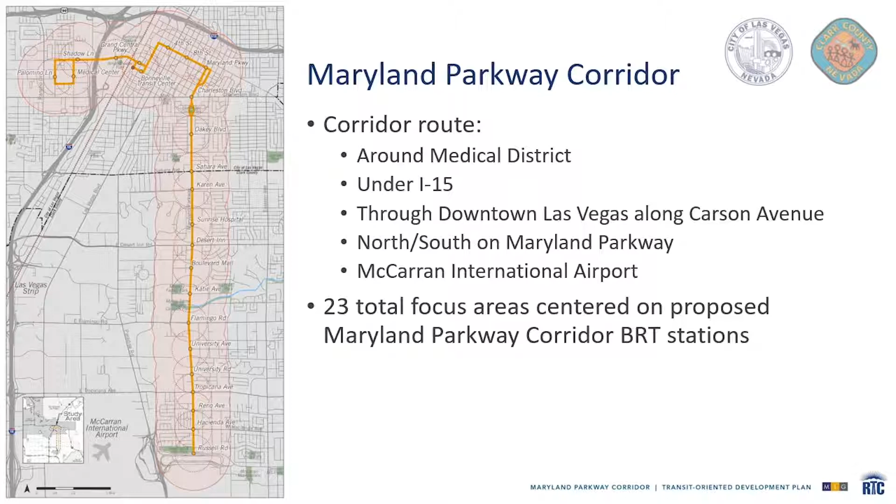In the City of Las Vegas, the focus areas include a half-mile radius around each station, so 1 mile across, focusing on the Medical Center station within the medical district, the Bonneville Transit Center on the west end of downtown, and the Charleston Boulevard station along Maryland Parkway. In the Clark County portion of the corridor, where the dividing line is Sahara Avenue, we included Sahara Avenue with a quarter-mile radius, so half a mile across for the focus area, along with Desert Inn Road, Flamingo Road, and University Road.

The last piece I'd like to touch on before handing it over to Andy is highlighting a couple of the key reports that informed the focus area plans, developed as interim deliverables throughout this effort. These included existing conditions analyses for the entire corridor, covering all 23 stations, as well as a market readiness analysis looking at conditions, both in terms of physical form along the corridor and economic realities for individual parcels and areas, which helped us in the prioritization process mentioned earlier.

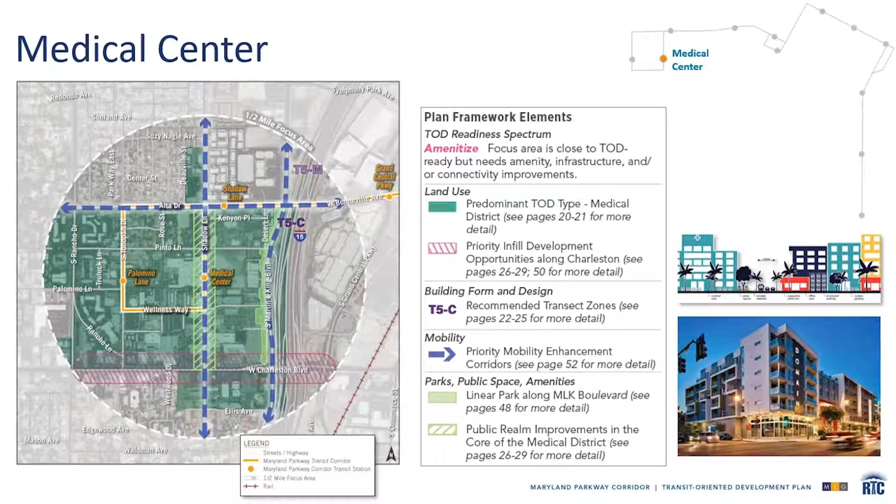For each TOD plan, we've identified a handful of priority projects that are aimed at improving infrastructure, creating or enhancing amenities, and/or kickstarting development in a way that is truly transit supportive. Think walkable, connected, and convenient for those who wish to use transit. All of this is done in an effort to help achieve the vision expressed by the community for each unique focus area.

So within the medical center, our first priority project deals with the intersections along Shadow Lane. The Medical District Master Plan already envisions a really bold future for this area within Las Vegas, and it looks at Shadow Lane as serving as a sort of main street within the medical district. What this priority project is recommending is to really leverage that identity and create a stronger sense of place by picking key intersections along Shadow Lane that can be treated in an extra special way, including wayfinding, gateway elements, perhaps intersection paint treatments, things that really lend to a strong sense of place and identity for the community, but also connect people really intuitively to transportation options.

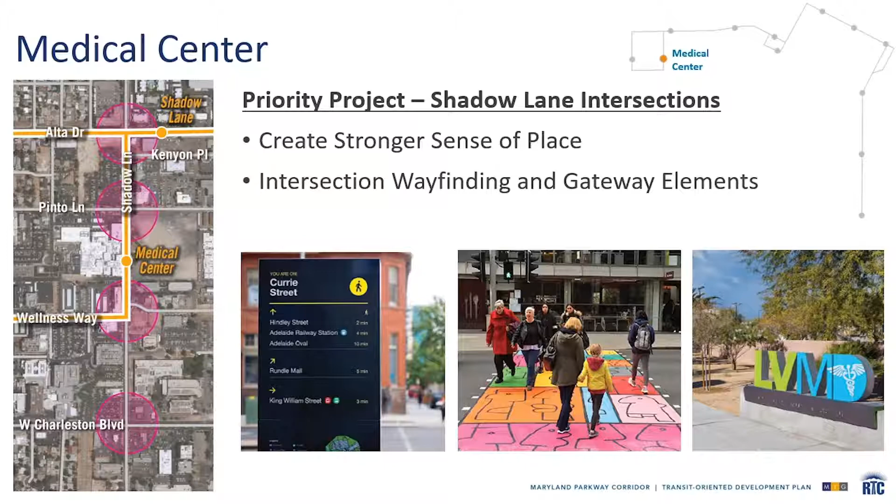The second priority project in the Medical Center looks at the eastern edge of our focus area and recommends a linear park along Martin Luther King Boulevard. Martin Luther King Boulevard today is a fairly well-trafficked, automobile-oriented corridor, and an investment like this would help amenitize that edge along Martin Luther King Boulevard to try to make it truly pedestrian-oriented, helping to accomplish the overall goals of making the environment more walkable within the focus area.

This would be an opportunity for the city to work with existing and future property owners to identify opportunities with underutilized or unused space in front of the properties along Martin Luther King Boulevard to try to help amenitize this space, again, for more pedestrian-oriented use. Amenities that could come along with this type of investment would be increased tree canopy and shade, the opportunity for a wellness trailhead that would connect directly to the medical district along Wellness Way, opportunities for pocket parks along this new trailhead, and a generous buffer that would allow pedestrians to feel safe and comfortable moving north and south along Martin Luther King Boulevard, set back from traffic.

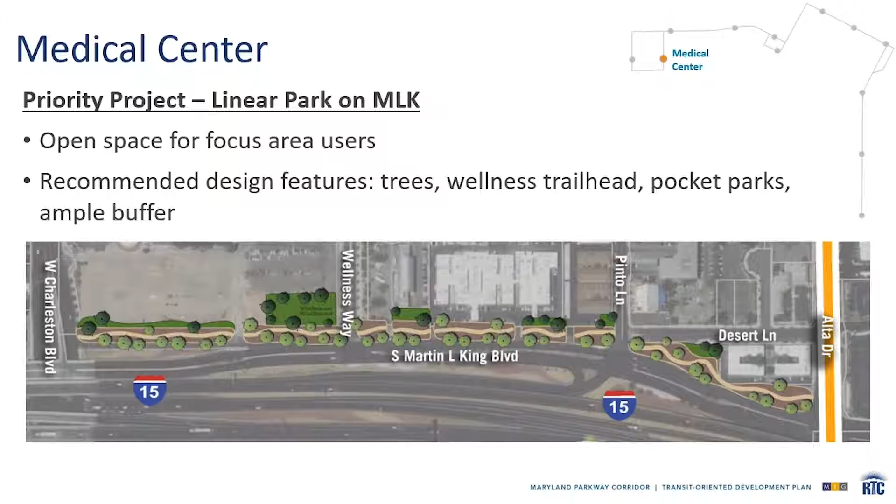The third priority project looks at diversifying the mix of uses within the medical center focus area. Within the medical district master plan, the vision for this area is predominantly medical uses. This priority project aims at encouraging new development to be really intentional about the mix of uses that it includes along with those medical uses.

For example, trying to integrate residential uses above medical uses in an effort to create activity outside of traditional working hours and the traditional work week. Similarly, being intentional about getting uses on the ground floor that contribute to the activity of the streetscape and provide opportunities for individuals using the medical uses to spend time outside of their appointments or working days—just opportunities to socialize and recreate.

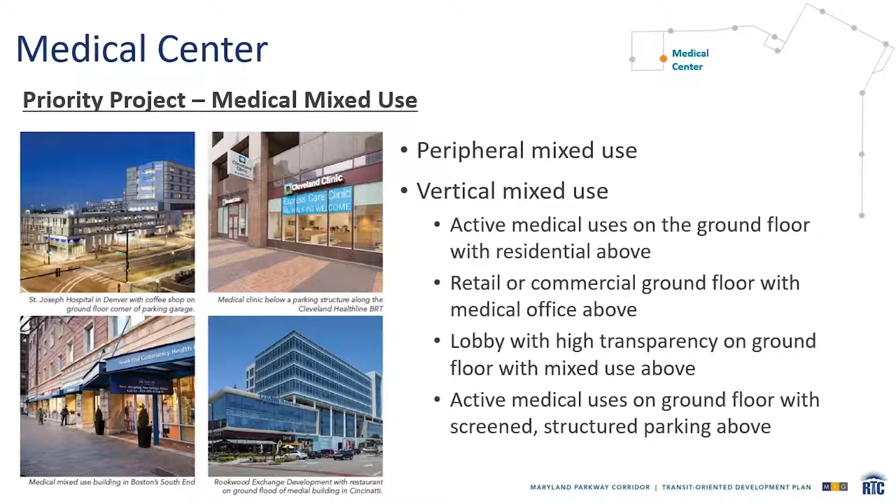Our final priority project within this focus area looks at development and pedestrian comfort and amenities along Charleston Boulevard. Charleston Boulevard serves as the southern edge of the medical district, and this priority project aims to provide recommendations for building frontages, heights, densities, an appropriate mix of uses, and corresponding pedestrian amenities to help transform this portion of Charleston Boulevard into a true gateway for the focus area and the medical district itself.

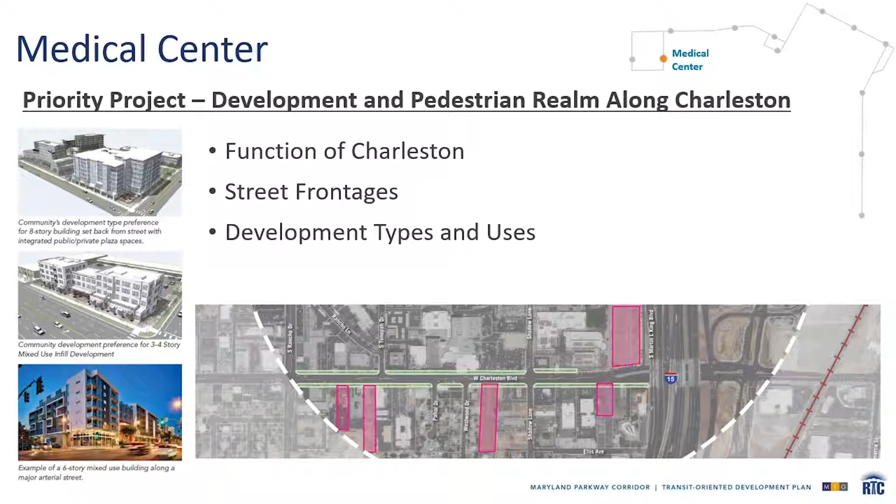This focus area is centered around the Bonneville Transit Center in central downtown Las Vegas. Currently, this area is primarily commercial, office, and civic land uses. There are also community facilities and a good amount of vacant land, but limited residential options. Major destinations or landmarks within this area include BTC itself, the Las Vegas North Premium Outlets, Symphony Park, the Las Vegas City Hall, Clark County Government Center, and many more.

The map on this page represents key highlights from the Bonneville Transit Center TOD plan. This focus area is ready for transit-oriented development already, which is likely to be spurred by the transit investment alone. The type of development we'd expect to see includes high-density, mixed-use buildings with active ground floor frontages. This aligns with the vision and desires we've heard from the community to date. There are especially opportunities for this type of development on parcels that are currently vacant or underutilized, especially near the Bonneville Transit Center, as seen on the map outlined in pink.

While this area already has a well-connected street network, this plan identifies a handful of corridors as priorities for multimodal mobility enhancements, including additional crossings over the railroad. This plan also identifies potential opportunities for parks and open space within this focus area to support current and future users of the BTC and to complement new or infill development.

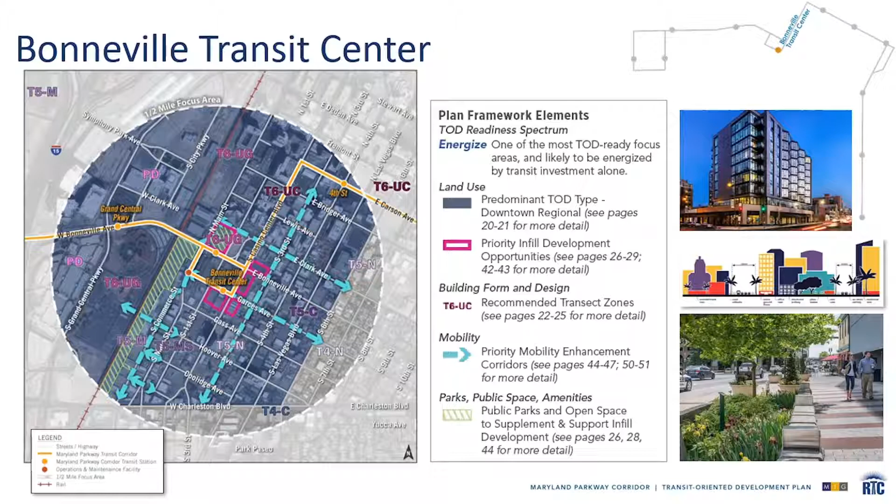For each TOD plan, we've identified a handful of priority projects that can help improve the infrastructure, kickstart transit-oriented development, and achieve the community's vision within these focus areas.

The first project within the BTC focus area is BTC and civic adjacent development opportunities. As seen on the map in pink, there are opportunities to combine parcels that are currently vacant or underutilized and integrate a mix of uses, especially with active ground floors with office or residential above, creating an active and walkable pedestrian environment.

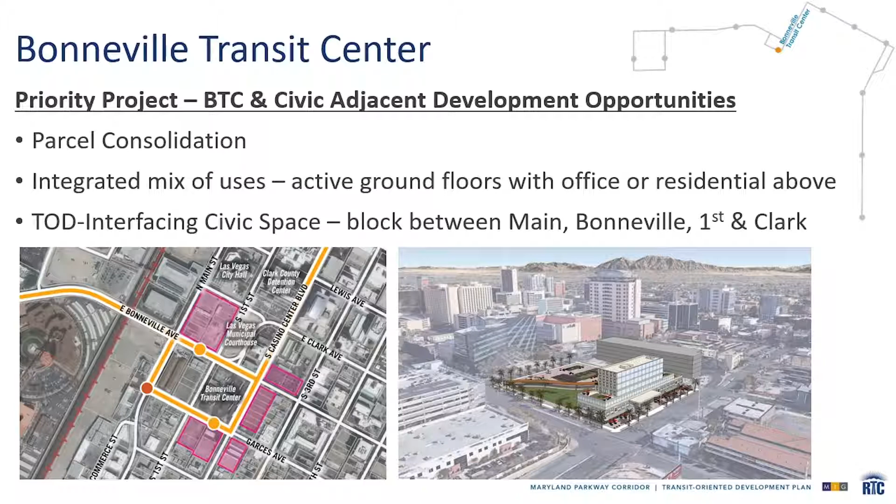The next priority project in this plan includes the parcels along Commerce Street. This is an opportunity for infill development where there's currently vacant land. The vision for this area includes a creative and tech corridor along the rail with potential public open space and additional rail crossings. There are also opportunities at Hoover, Coolidge, and Boulder to connect across Main over to Commerce and increase the pedestrian network.

New development is envisioned to be about 3 stories with active ground floors, maybe with different uses such as galleries, makerspace, or breweries.

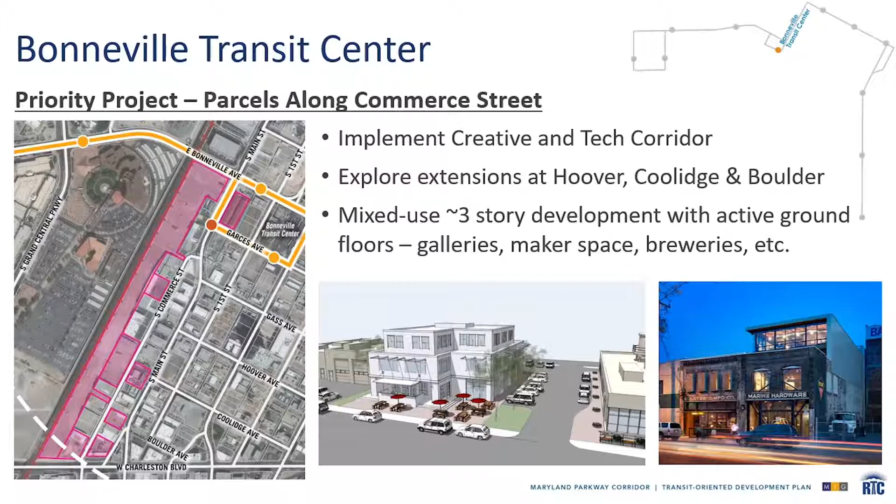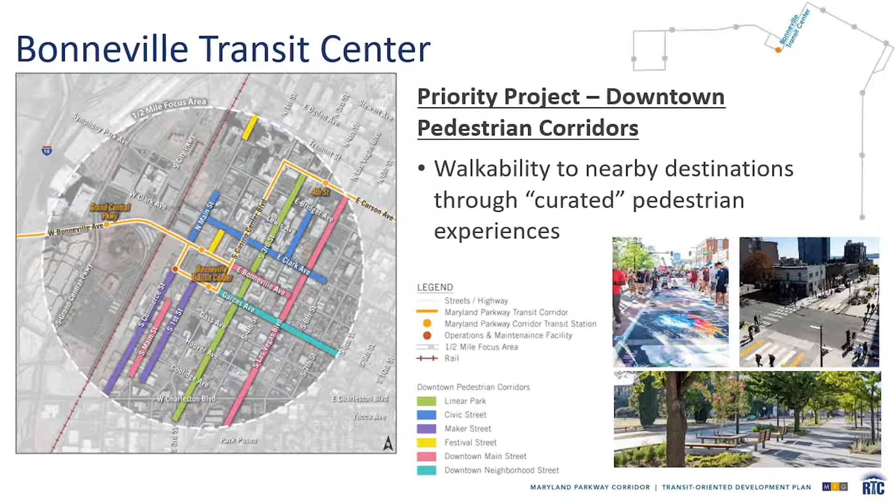The last priority project for the Bonneville Transit Center focus area is Art District branding and wayfinding. This project looks at leveraging all the recent work and momentum from 18B Art District and continuing to realize that cultural hub character. The plan looks at additional options for amenitizing the public realm with branded elements, implementing a pedestrian-scaled wayfinding program, and pairing that with design standards that enrich and preserve the unique character of the area.

The next TOD plan that we'll take a look at is for the Charleston Boulevard focus area. Like the Medical Center and Bonneville Transit Center focus areas, this focus area extends a half mile in all directions from the proposed station location, in this case, the intersection of Maryland Parkway and Charleston Boulevard.

The area is currently made up of primarily single-family residential uses in the southern portion of the focus area, with a mix of commercial uses in the north and along Charleston Boulevard itself. Major destinations and landmarks within the area that you might be familiar with include the Huntridge Theater, Huntridge Circle Park, the Las Vegas Academy of the Arts, and John S. Park Elementary School, among many others.

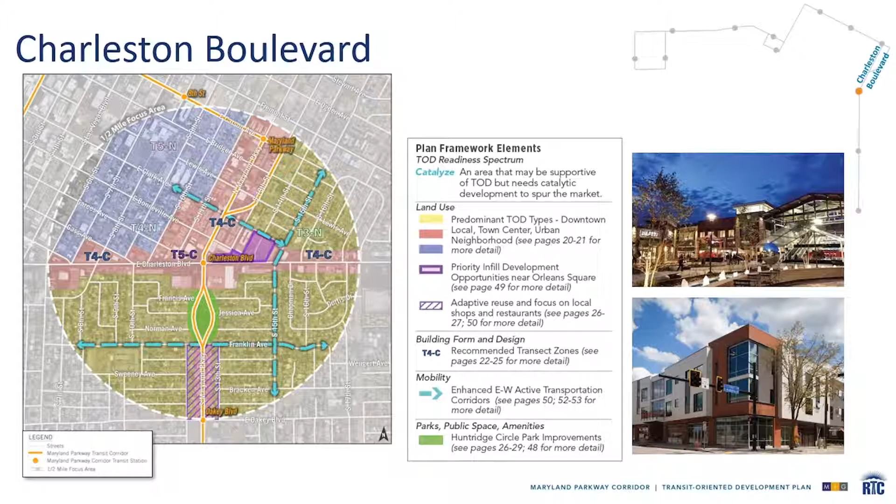The type of development we'd expect to see here would include corridor and center-type development to help transition from downtown into the surrounding neighborhoods. While this area already has a well-connected street network, this plan identifies a handful of corridors as priorities for multimodal mobility enhancements, specifically for bicycle users. This plan also identifies improvement opportunities for Huntridge Circle Park and the adaptive reuse of buildings along the Maryland Parkway Corridor to help retain their local character while leaving open the opportunity to evolve into different uses in the future.

As you've seen for each of the TOD plans, we've identified a handful of priority projects here in the Charleston Boulevard focus area that are aimed at improving infrastructure, creating or enhancing community amenities, and/or kickstarting development in a way that is truly transit supportive to help achieve the vision expressed by the community for each of our unique focus areas. For the Charleston Boulevard focus area, the first of those priority projects looks at improvements to Huntridge Circle Park.

This priority project aims to establish Huntridge Circle Park as a community destination, both for the surrounding neighborhoods and for new transit users within the area. It's important to note that the recommendations within this priority project amount to more than just cleanup. We've heard concerns from the community about safety and visibility. Longer-term solutions look at including security, long-term maintenance, and management both of the park and the surrounding amenities, whereas short-term solutions look at more soft enforcement and directing those that are occupying the park for longer durations towards community resources and social services.

The second priority project in this focus area provides recommendations for development near or within Orleans Square, and particularly along the frontage of Charleston Boulevard. This priority project looks at opportunity parcels and underutilized parcels within this smaller geography and provides recommendations on the types of mix of uses, building heights, and densities that could help frame a consistent edge along Charleston Boulevard, making it more pedestrian friendly and providing a really comfortable transition from downtown into the neighborhoods.

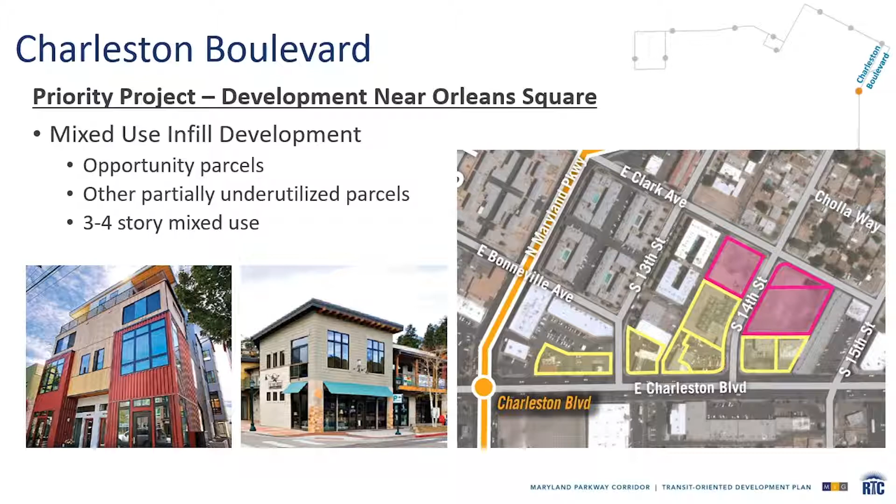The final priority project within this focus area looks at how best to connect the nodes that already exist within this focus area to the surrounding neighborhoods themselves. Building off the momentum of the previous project that looked at development and infill opportunities in and around Orleans Square, this priority project acknowledges the existing mixed use and commercial development momentum around the intersection of Charleston Boulevard and Maryland Parkway, as well as along the frontage of Maryland Parkway south of Huntridge Circle Park.

This priority project then looks at opportunities to connect those nodes better to the surrounding neighborhoods and into and out of downtown, with stronger east-west and north-south bicycle and pedestrian connections. It also speaks to continuing the house-to-business conversion trend along Maryland Parkway that helps retain the unique character within the focus area while still providing opportunities for uses to evolve over time.

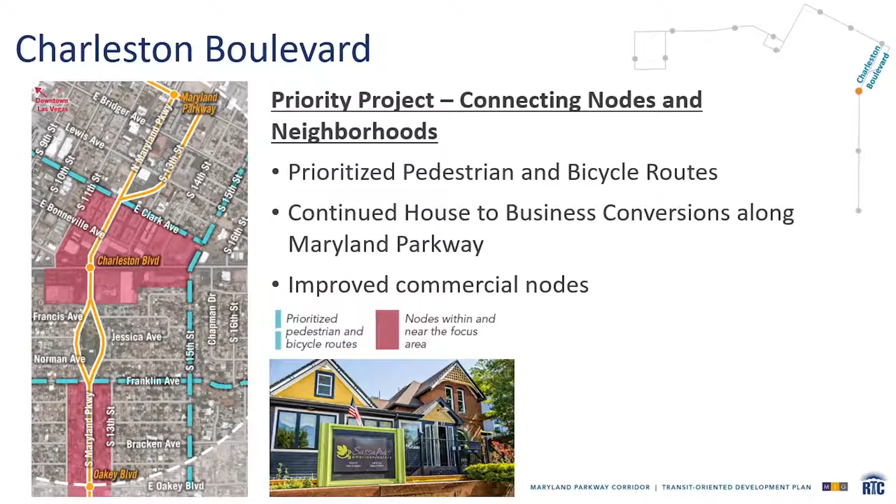This focus area is centered around the station at the intersection of Sahara Avenue and Maryland Parkway. Here we're looking at a quarter-mile radius from the station. The focus area is half within the city of Las Vegas and half within unincorporated Clark County.

Currently, this area is primarily commercial land uses with some supportive multifamily residential. Major destinations or landmarks within this area include the John C. Fremont Middle School, City Impact Center, Commercial Center, New Orleans Square, Las Vegas Athletic Club, Smith's Grocery Store, and Baker Park.

This focus area has a somewhat unintuitive pedestrian network besides along the major corridors. This plan identifies a handful of connections as priorities for multimodal mobility enhancements. This plan also identifies the need for parks or open space near the major intersection to serve the community in the area, business patrons, and transit riders.

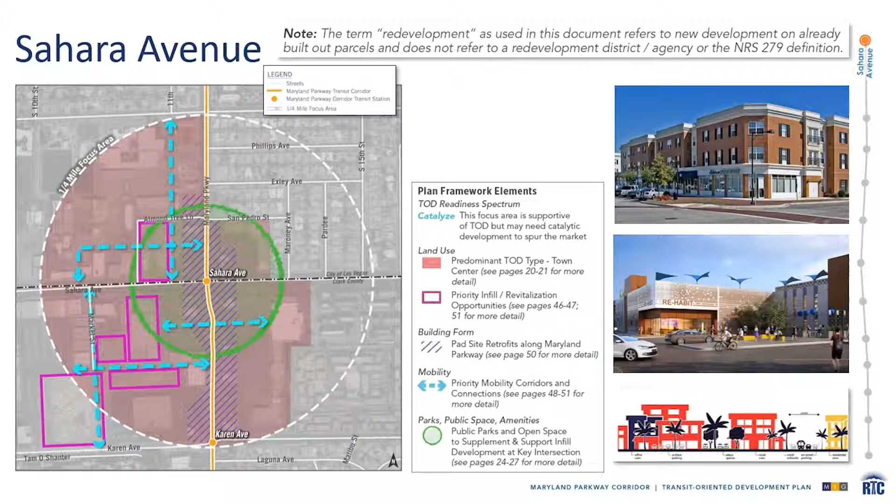The first priority project within the Sahara Avenue focus area is infill or revitalization opportunities on the southwest quadrant.

Recently, the redevelopment agency has been reestablished in Clark County. There are opportunities within this area to develop mixed-use infill with an emphasis on affordable housing, especially on parcels that are currently vacant or underutilized. There's also the opportunity to reuse or redevelop existing vacant buildings.

Within this project, we also looked at potential new connections, both east-west to Maryland Parkway and an extension of Market Street to the south, as shown in blue arrows on the map on this page.

The next priority project for Sahara Avenue focus area looks at pedestrian connections. This focus area has a lot of large surface parking lots without formal or safe feeling pedestrian connections between the stores and the street. This project has an emphasis of breaking down the scale of these large surface parking lots,

as well as enhancing them through pedestrian scaled lighting and landscaping when possible. Also in these areas and along these connections, we recommend signage and wayfinding to support transit riders who may be navigating from the businesses to or from the transit station.

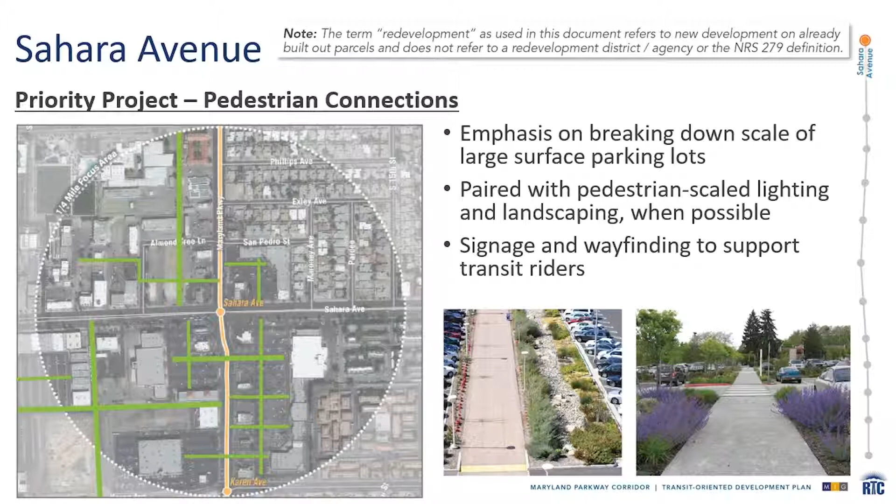The next priority project in this focus area looks at the potential for pad site retrofits or urban design improvements, in particular along Maryland Parkway.

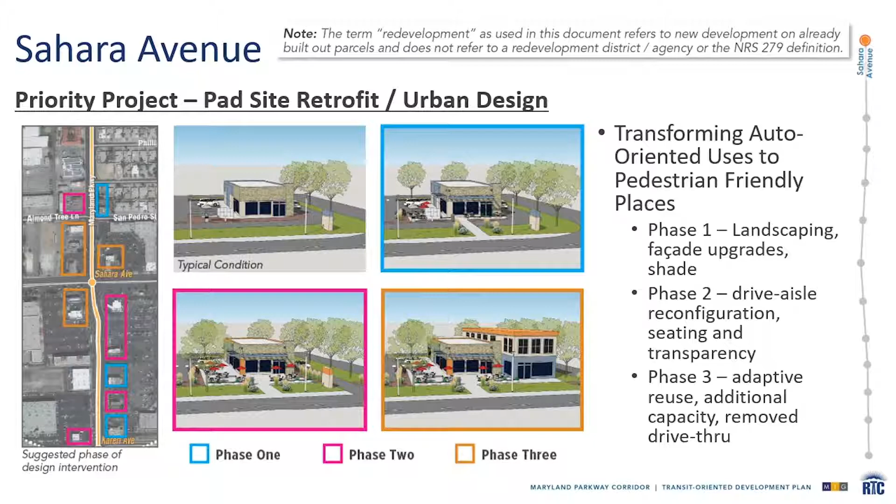Second phase could include a drive aisle reconfiguration, seating outdoors, and transparency into the building to activate the pedestrian realm. Lastly, there's the potential for adaptive reuse of a pad site designed building, increasing the capacity of that building, creating a mix of uses, and removing the auto-oriented drive-through.

The last priority project for the Sahara Avenue focus area looks at the possibility for redevelopment and public realm improvements in the northwest quadrant. Vacant and underutilized parcels in this prominent location provide both short-term and long-term redevelopment opportunities, should the property owners choose to do so.

More short-term potential redevelopment opportunities are shown in an orange outline on this map. Blue outlines represent areas that are more long-term redevelopment opportunities due to existing buildings and potentially requiring the consolidation of parcels. The diagram also shows enhanced pedestrian connections in pink arrows that would create a better network within this area. Any new development in this area is envisioned to be small-scale mixed-use or multifamily with active retail on the ground floor.

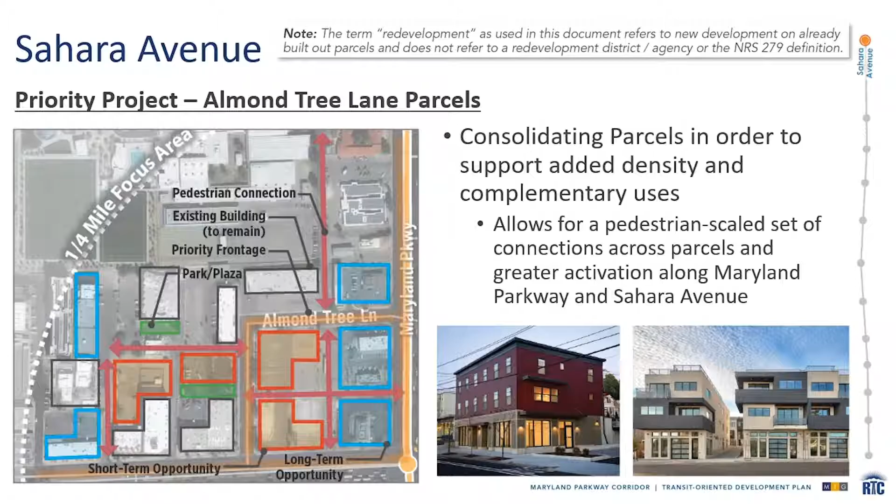This focus area is centered around the intersection of Desert Inn Road and Maryland Parkway, extending a quarter mile in all directions from the proposed station location. Located just south of Sunrise Hospital, the area is currently made up of primarily commercial and supportive medical uses with larger areas of surface parking and a mix of single and multifamily residential. Major destinations and landmarks include Sunrise Hospital itself, Las Vegas Country Club, and Boulevard Mall.

The plan also identifies a handful of connections that would help provide safer access for nearby residents to the Maryland Parkway Corridor itself. Finally, other recommended improvements include identifying opportunities for publicly accessible private open space that could be encouraged along with new development along the corridor, as well as enhancing the walkability to smaller commercial sites along the corridor itself.

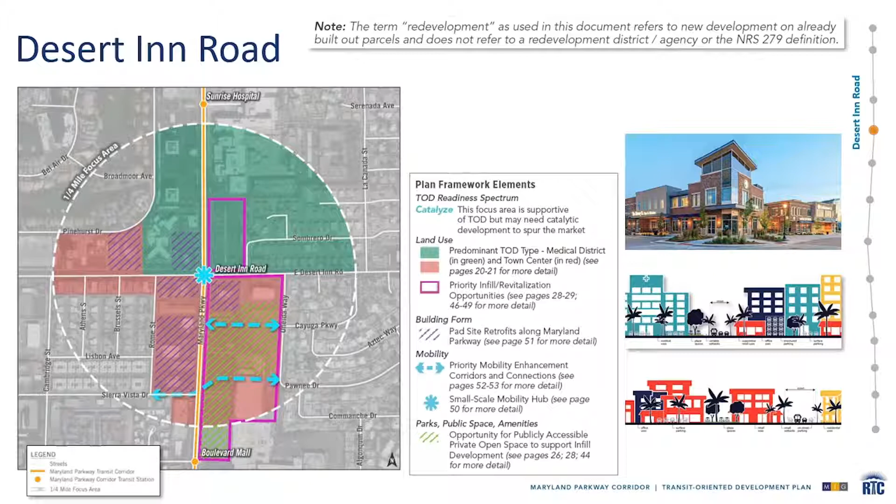As we've done for each of the other TOD plans, we've identified a handful of priority projects within the Desert Inn Road focus area aimed at improving the infrastructure, creating or enhancing additional amenities, and/or kickstarting development in a way that's truly transit supportive to help realize the vision expressed by the community in this unique focus area. Within the Desert Inn Road focus area, the first of these priority projects looks at infill and revitalization opportunities around the Boulevard Mall.

This project recommends that as this area looks to develop or redevelop in the next 20 to 30 years, it should be really intentional about finding opportunities to provide additional community amenities. That can be in the form of publicly accessible private open space, a more varied mix of uses, and/or infill development right along the Maryland Parkway Corridor itself to help create a more walkable and welcoming environment along that frontage.

Importantly, it also looks at providing safer and more intuitive connections across the large surface parking lots and into the neighborhoods to the east, making sure that residents have convenient and safe access to the Maryland Parkway Corridor itself and opportunities for increased transit.

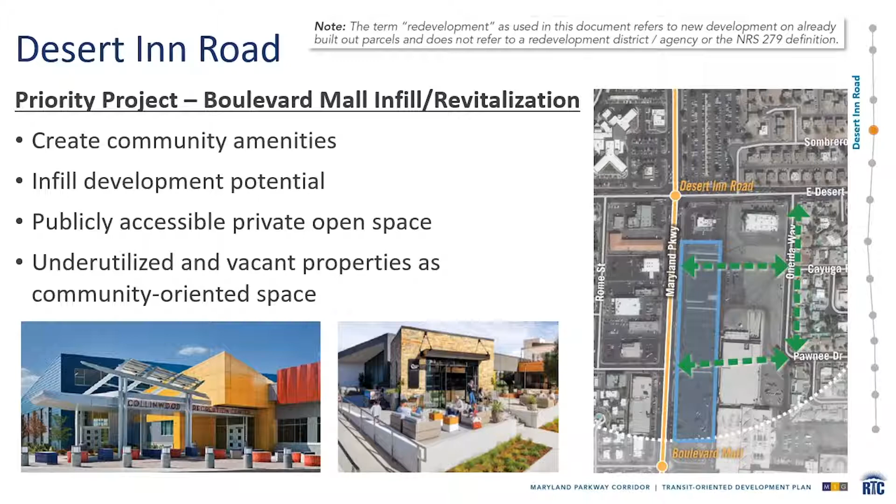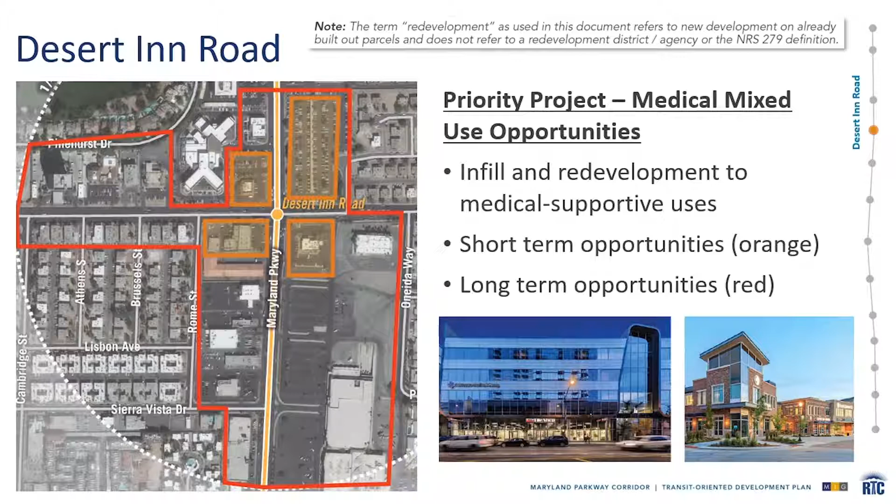This strategic infill could take the form of medical uses stacked on top of active ground floor uses like shops and restaurants, or in the form of residential and office opportunities stacked on top of medical uses. It could also take the form of a more horizontal mixed use, where an adjacent building that doesn't have a medical use could help support the activity and vibrancy of an existing medical use on the property next to it.

Our third priority project for this focus area explores enhancements to transportation opportunities within the focus area. For this priority project, that comes in the form of a small-scale mobility hub opportunity that could be located nearby the intersection of Maryland Parkway and Desert Inn Road. Leveraging the momentum of these two major mobility corridors, a mobility hub would help provide transit users safe and intuitive access to major destinations along each of these corridors.

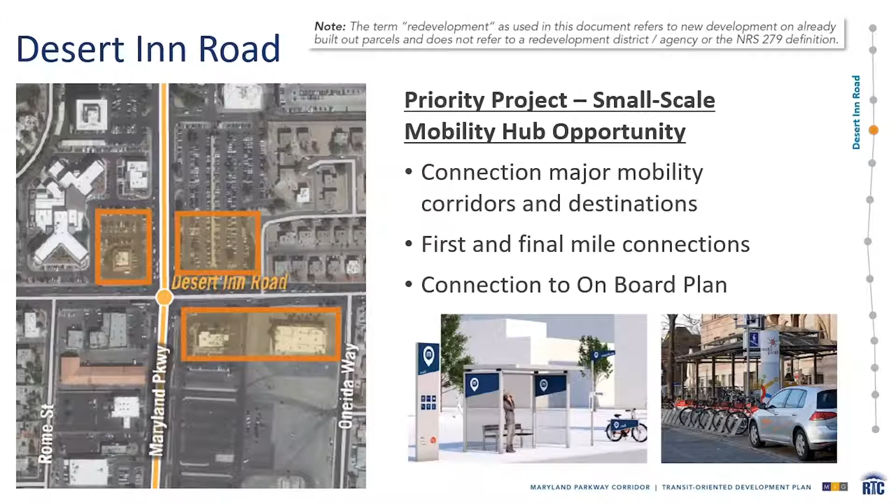A mobility hub allows transit riders to have safe and convenient access to bicycles, scooters, or other micromobility options that can help make their journey much easier on that first or final mile of their connection to transit.

Our final priority project for the Desert Inn Road focus area looks at urban design and retrofit opportunities for commercial pad sites along both the Maryland Parkway Corridor and the Desert Inn Road corridor. What this project recommends is a series of phases that could be explored by property owners to help transform what are currently more auto-oriented uses to more pedestrian-friendly and transit-supportive uses along each corridor.

Each phase could be accomplished independently and doesn't necessarily presume that each of the three phases needs to be accomplished to make something more transit supportive. The first phase looks largely at upgrades to landscaping and facade improvements.

A second phase that could be explored looks at drive aisle reconfiguration, orienting the parking more along the interior of the site rather than along the corridor itself, and providing more pedestrian and transit user amenities like seating and higher transparency along the corridor so users can see the activity occurring within the use.

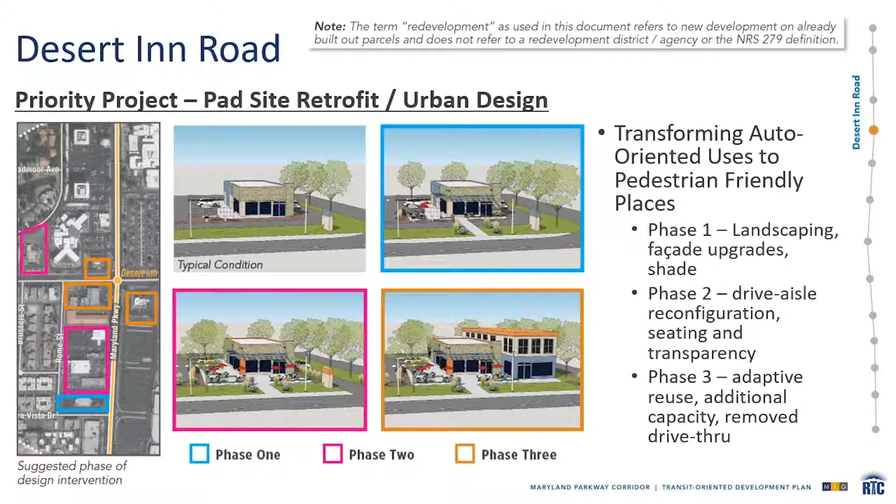And a potential third phase looks at adaptive reuse of these existing buildings, potentially adding additional capacity or additional uses in order to create an environment that really does cater to transit users and walkability along the corridor.

This focus area is centered around the station at the intersection of Flamingo Road and Maryland Parkway in the Paradise neighborhood. Currently, this area is primarily auto-oriented commercial with some multifamily residential.

Unique assets of this focus area include the Flamingo Wash running along the northern portion, the proximity to UNLV, and some really high-density housing. Major destinations or landmarks within this area include the Clark County Library, UNLV, and Albertsons grocery store.

The map on this page represents some key highlights from the Flamingo Road TOD plan. This focus area is close to ready for transit-oriented development, but needs some amenity infrastructure and connectivity improvements.

The type of development we expect to see in this area includes mostly retail or commercial uses and public gathering spaces with some additional housing. It could have a town center type of feel and serve as a local destination for residents and visitors.

One area on the map, identified in a pink outline along the south edge of the Flamingo Wash, is a priority for potential improvements or redevelopment. This aligns with the vision and desires we've heard from the community to date.

This focus area has a somewhat unintuitive pedestrian network besides along the major corridors. This plan identifies a number of connections as priorities for mobility enhancements. This plan also identifies phased improvements to the Flamingo Wash in order to transform that into a public amenity, and the potential for a flexible community space within the currently underutilized parking lot at the Clark County Library.

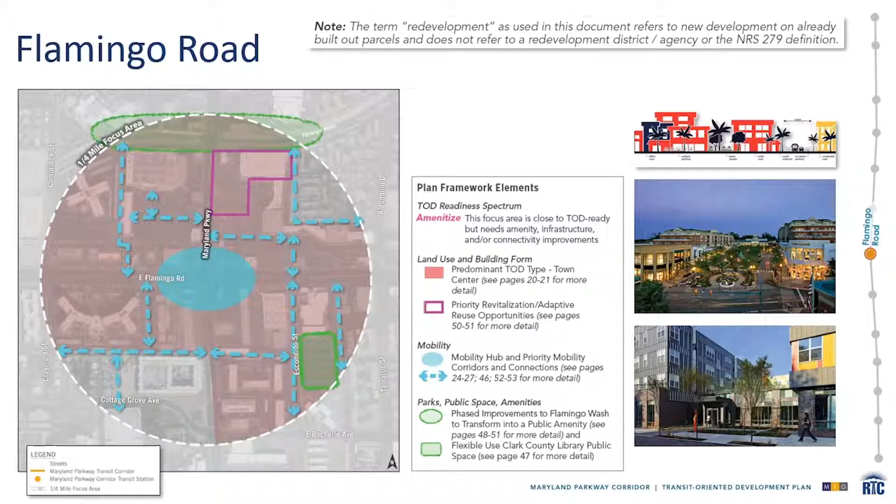The first priority project for the Flamingo Road focus area is the opportunity for a large-scale mobility hub near the major intersection and near the proposed stations. A mobility hub in this location can improve people's first and final mile connections, especially for transit riders, and provide a variety of mobility options.

There's a number of areas close to the station, as well as a little farther out, that serve as opportunities for this hub.

On Board Mobility Plan from RTC also provides significant guidance for proposed mobility hubs in the Las Vegas Valley. Any efforts as a result of this plan should and will align with recommendations from On Board.

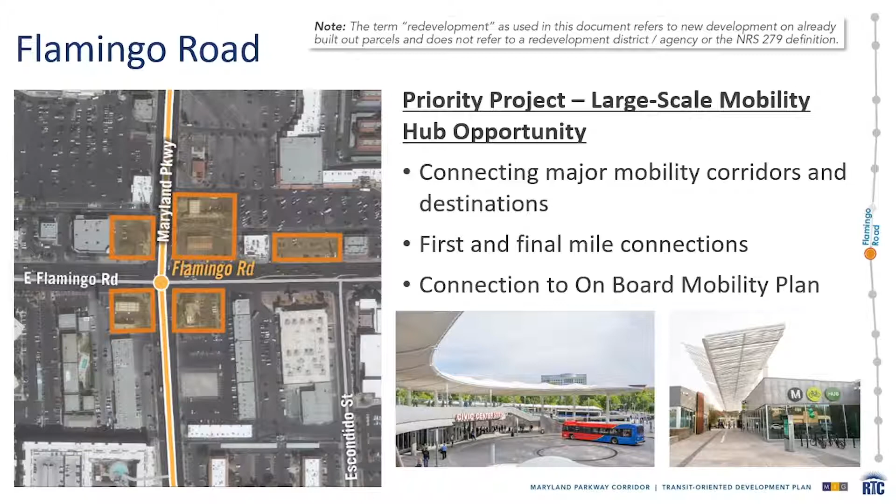The next priority project for the Flamingo Road focus area is the potential of transforming the parking lot by the Clark County Library into a public space. Currently, the parking lot is underutilized and may be larger than it needs to be, so there's an opportunity to create a multifunctional community space and amenity in this location.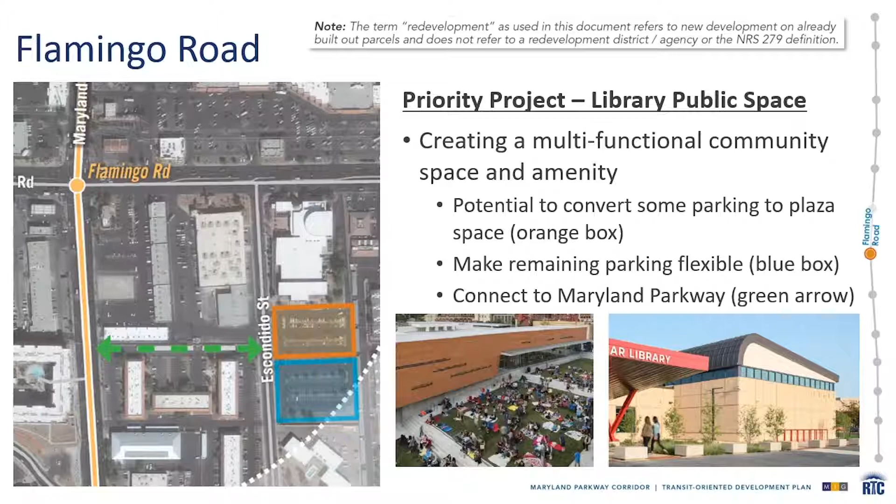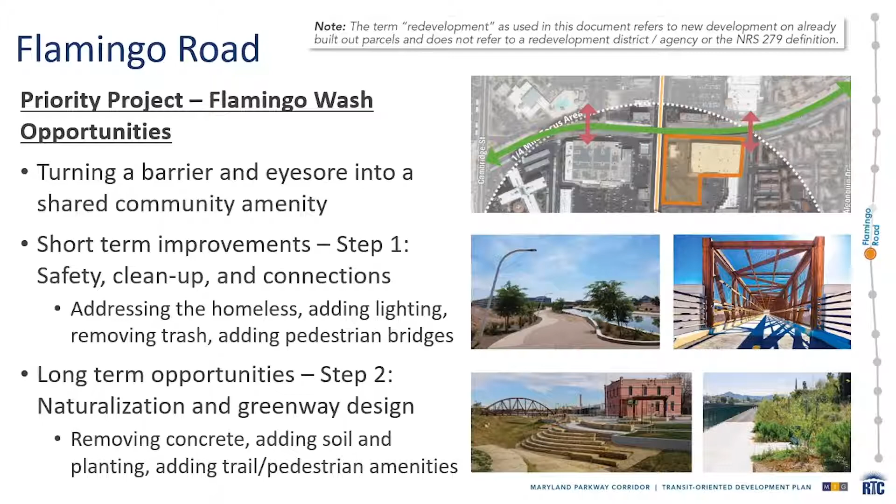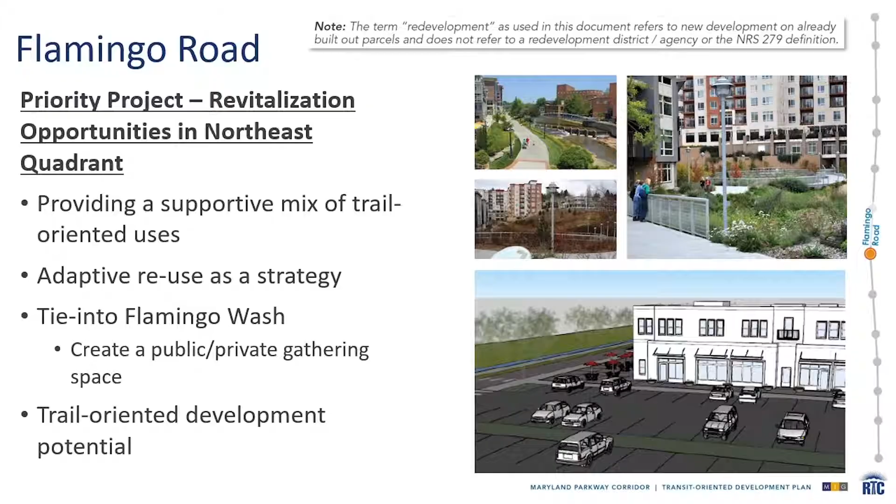And the last of our 7 focus area TOD plans is the University Road focus area. This focus area is centered around an entry point into the UNLV campus at the intersection of University Road and Maryland Parkway. Like the other focus areas within the county, it also extends a quarter mile in all directions from the proposed station location.

From a land use standpoint, the area is currently made up of primarily commercial uses with a strong educational component and a wide mix of housing types serving both the university and the surrounding community. Major destinations and landmarks you may be familiar with within the area include not only the UNLV campus and its bookstore, but also the University Gardens Shopping Center, College Town Plaza, and the UNLV Transit Center.

The type of development that we expect to see in this area includes higher density mixed-use development along the corridor itself with appropriate transitions to the adjacent residential neighborhoods and the campus. Opportunities for more community-serving amenities and stronger connections to and from the corridor can help the neighborhoods more seamlessly engage and interact with the university campus within this focus area.

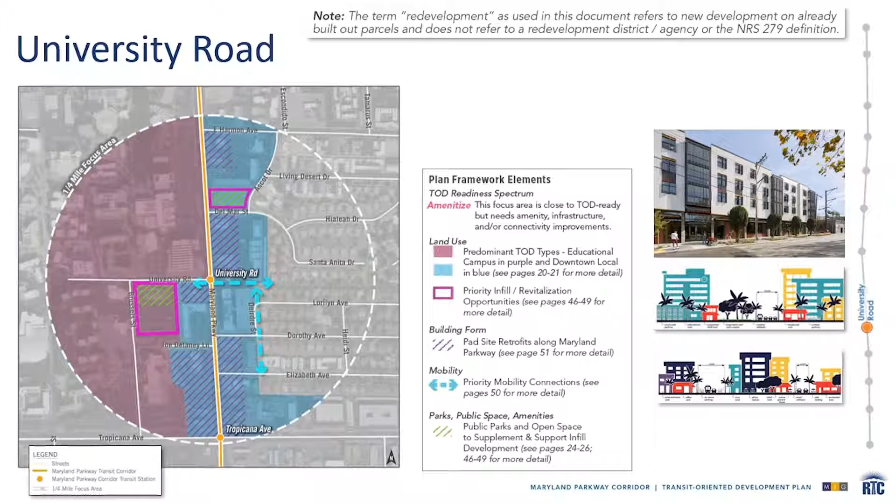Within each TOD plan, we've identified a handful of priority projects aimed at improving infrastructure, creating or enhancing amenities, and or kickstarting development in a way that's truly transit supportive for the rest of the focus area, in an effort to help achieve the vision expressed by the community.

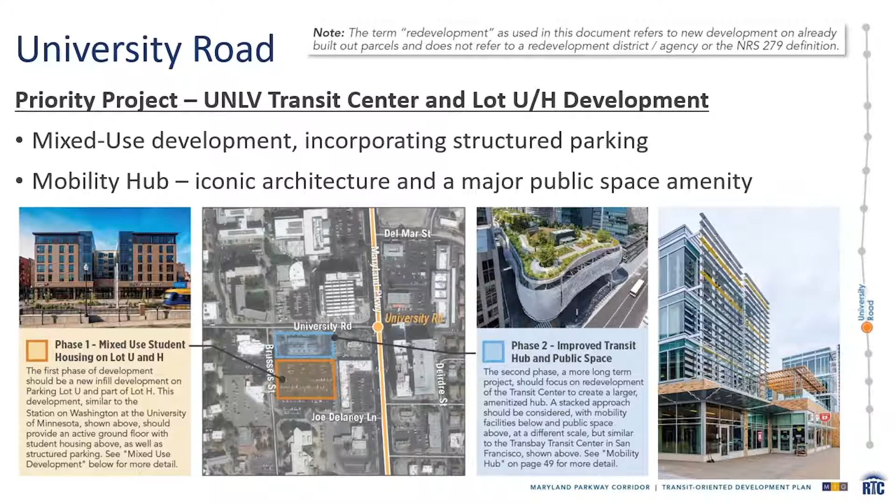The second priority project for this focus area responds to an identified need along the corridor, and in particular within this focus area, for supportive workforce housing and student housing. This priority project outlines opportunities for partnerships and incentives to help blend flexible housing types and configurations, incentivizing a mix of graduate students, non-university community members, faculty, and staff living and gathering together. This type of development can accommodate a variety of different unit sizes and can also incorporate services and community open spaces that serve both university users and the broader community.

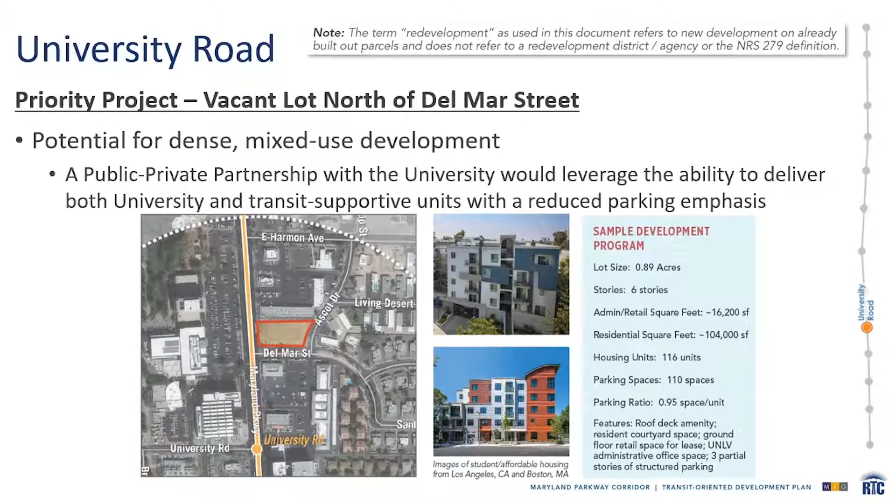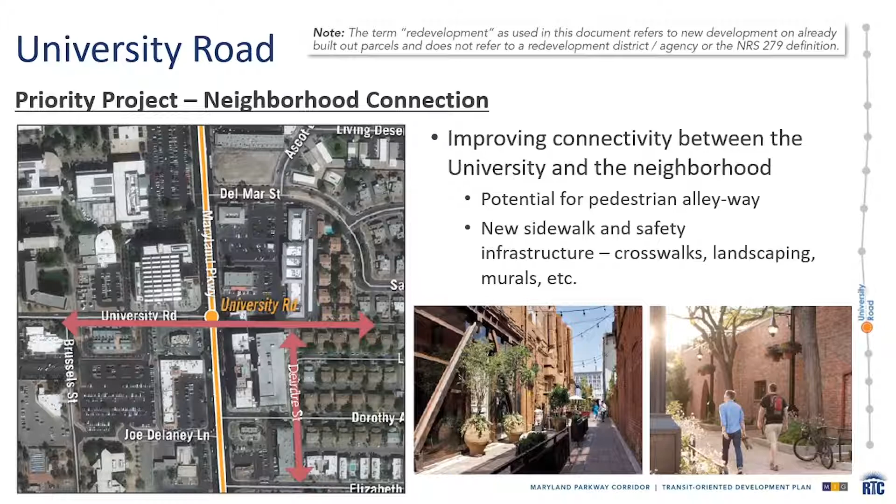The next priority project within this focus area looks at connectivity between the UNLV campus and the surrounding neighborhoods, identifying a specific connection potential from University Road moving east into the neighborhoods by way of a pedestrian alleyway. This priority project also explores north-south connectivity along Deirdre Street, recommending new sidewalk and safety infrastructure, providing crosswalks, landscaping, and murals to provide a welcoming and safe gateway to and from Maryland Parkway.

Our final priority project for the University Road focus area employs a strategy that we've used for other TOD plan focus areas in this effort. The project looks at urban design opportunities and retrofit opportunities for commercial pad sites directly adjacent to the Maryland Parkway Corridor. This project suggests a range of different phases of design intervention or enhancement, ranging from enhanced landscaping and facade improvements to increased seating and opportunities for pedestrian amenities, all the way to adaptive reuse potential and the opportunity for additional capacity through expansion of the existing use. Each of these strategies is aimed at helping to transform what are currently more auto-oriented uses to more pedestrian-oriented and transit-supportive places.